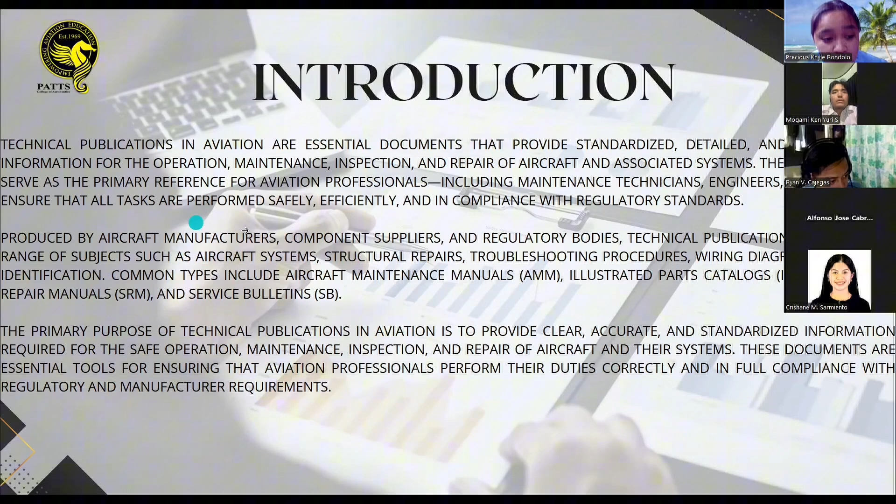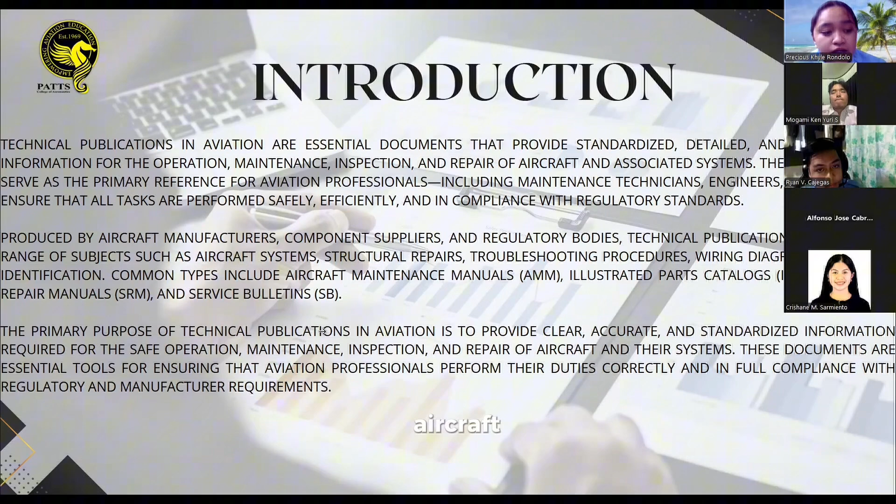The introduction explains the importance and purpose of technical publications in aviation. These documents are created by manufacturers, suppliers, and aviation authorities to provide clear, standardized, and authoritative instructions for operating, maintaining, and repairing aircraft. They ensure tasks are done safely and in line with regulation. Examples: aircraft maintenance manual, illustrated parts catalog, and service bulletins.

And for the summary of our topic, technical publications are critical documents that provide comprehensive, standardized information for the safe, efficient operation, maintenance, and repair of aircraft and their components. These publications are created by aircraft manufacturers, component suppliers, and aviation regulatory authorities to ensure that all aviation personnel, such as maintenance technicians, engineers, and pilots, have access to accurate and up-to-date technical guidance.

Aviation technical publications cover everything from routine inspection and troubleshooting procedures to complex repair instructions and system overviews. These documents help maintain compliance with strict safety regulations set by aviation authorities like the Federal Aviation Administration and the European Union Aviation Safety Agency.

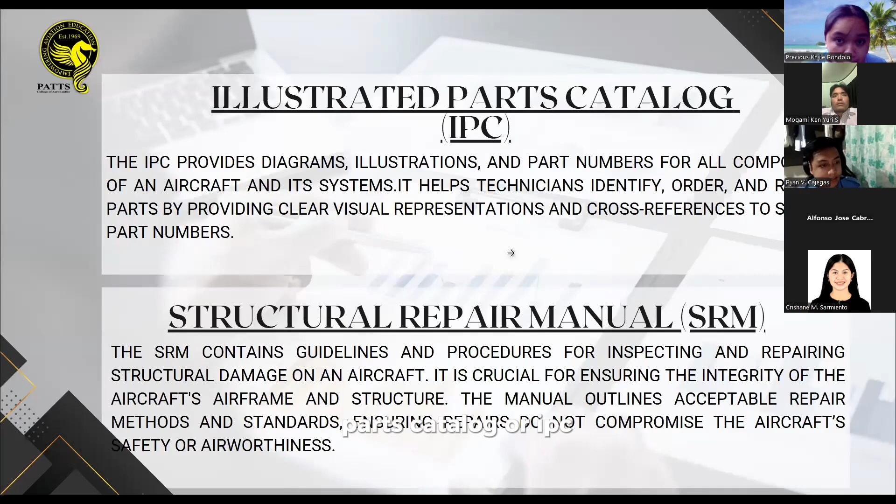Types of technical publication. Illustrated Parts Catalog, or IPC. The IPC provides diagrams, illustrations, and part numbers for all components of an aircraft and its systems. It helps technicians identify, order, and replace parts by providing clear visual representation and cross-reference to specific part numbers. This includes all parts for all systems and it's usually not customized by airline configuration. However, when the aircraft is customized, it will show parts by figure, part number, and item number with aircraft applicability. The second is Structural Repair Manual, or SRM.

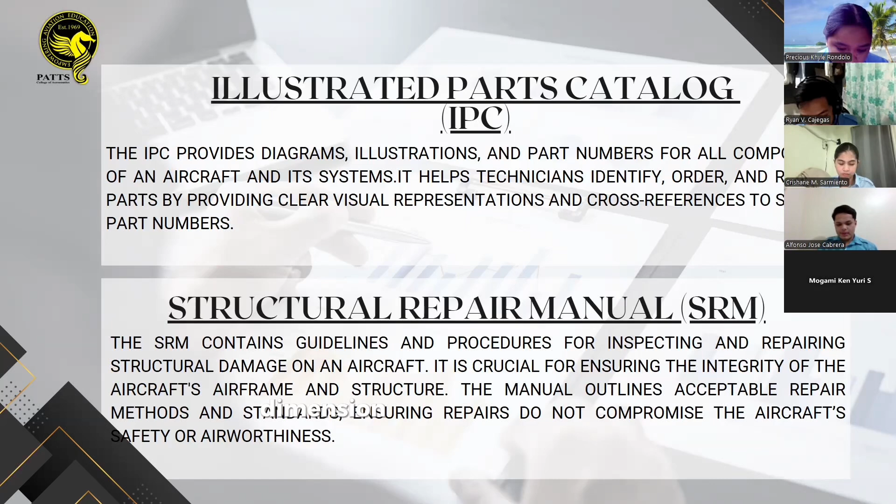The SRM contains guidelines and procedures for inspecting and repairing structural damage on aircraft. It's crucial for ensuring the integrity of the aircraft airframe and structure. The manual outlines acceptable repair methods and standards, ensuring repairs do not compromise the aircraft's safety or airworthiness. The SRM gives the acceptable dimensions and limits of damage to the aircraft structure, so the operator knows when the damage should be fixed.

The next one is Component Maintenance Manual, or CMM. The CMM provides detailed instructions for maintaining and overhauling individual aircraft components, such as engines, avionics, landing gear, and other critical systems. This manual guides technicians through the maintenance, inspection, and overhaul process for specific components. For the SRM and CMM, the components installed on the aircraft are chosen by the airline. The next one is Service Bulletin, or SB.

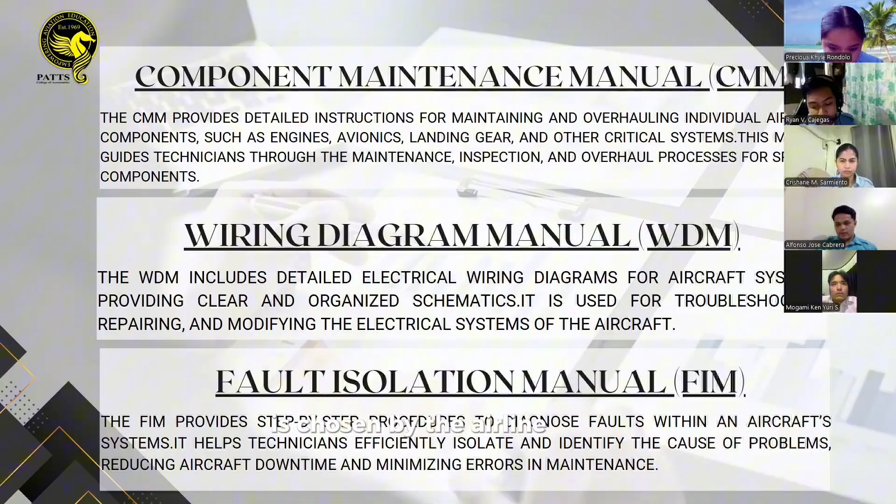Service Bulletins are issued by the manufacturer to provide important information about aircraft modification, upgrade, or safety recommendations. They offer updates and enhancements or fixes that improve the performance, safety, or reliability of the aircraft. SBs can be voluntary or mandatory depending on the nature of the information.

For example, if the flight crew seat has a vertical adjustment.

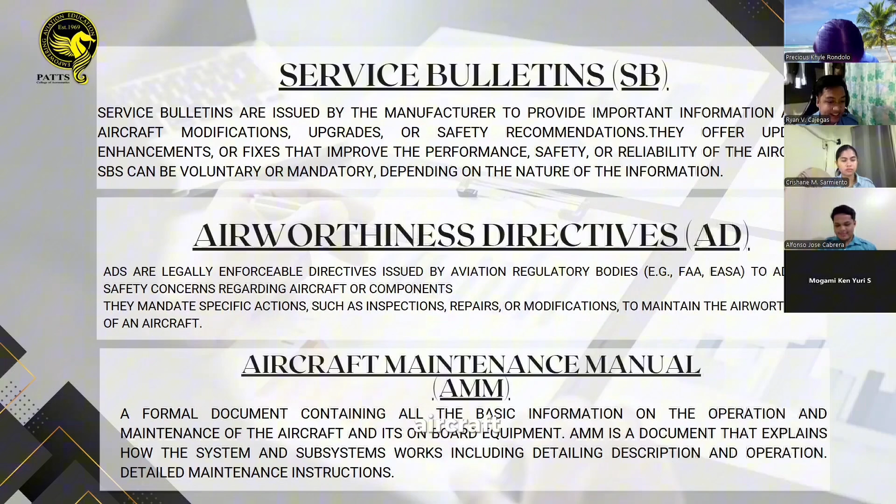The next one is Airworthiness Directive, or AD. ADs are legally enforceable directives issued by aviation regulatory bodies to address safety concerns regarding aircraft or components. They mandate specific actions such as inspection, repairs, or modification to maintain the airworthiness of an aircraft.

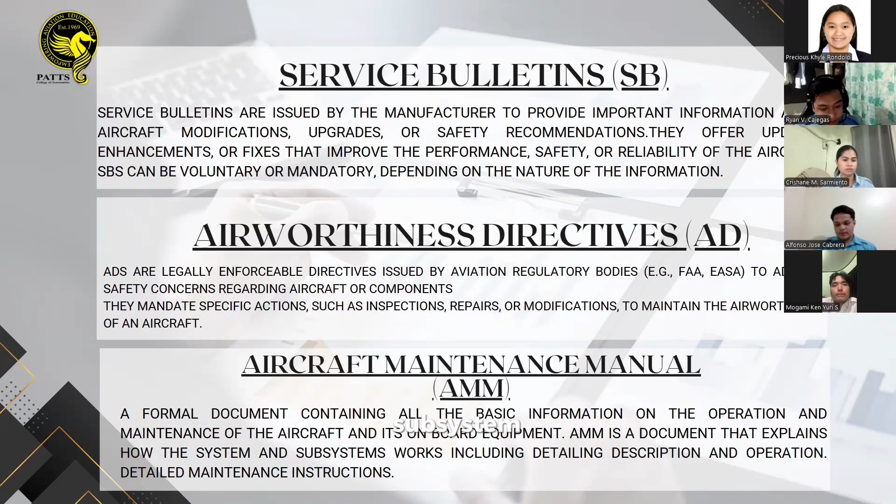The next one is Aircraft Maintenance Manual, or AMM. A formal document containing all the basic information on the operation and maintenance of the aircraft and its on-board equipment. The AMM is a document that explains how the system and subsystem work, including detailed description and operating detail, maintenance instructions.

Next one is function of technical publication.

Technical publications provide clear step-by-step instructions for the maintenance, repair, and servicing of the aircraft and their components. This helps maintenance personnel perform tasks accurately, reducing the risk of errors and ensuring the aircraft is in optimal working condition. Maintenance guidance provides detailed instructions about scheduled and unscheduled maintenance, ensuring the systems are serviced correctly.

Next is troubleshooting and fault isolation. Technical publications, especially the fault isolation manual or FIM, offer systematic procedures to diagnose and isolate faults in various aircraft systems. They enable technicians to quickly identify and resolve issues, minimizing downtime and ensuring the aircraft is returned to service promptly. Troubleshooting and fault isolation outlines systematic procedures to detect, diagnose, and isolate system malfunctions.

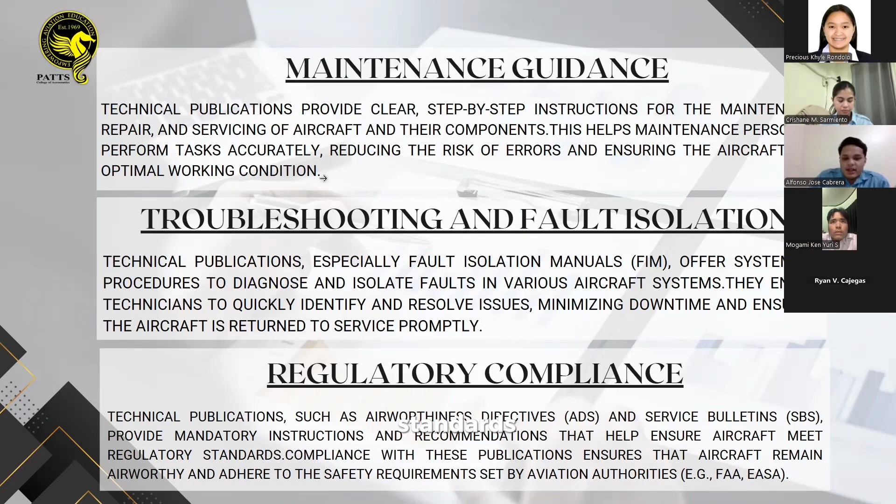Next is regulation, such as airworthiness directives or ADs, and service bulletins, which provide mandatory instructions and recommendations that help ensure aircraft meet regulatory standards. Compliance with these publications ensures that aircraft remain airworthy, ensuring all maintenance and operational practices meet aviation standards, especially the standards of FAA and EASA.

These standards apply to maintenance and operational procedures across different operators and locations. Standardization ensures that all maintenance activities are performed uniformly, improving safety and reducing the chances of errors or misunderstandings. This standardization of procedures implements a uniform process across maintenance activities to ensure consistency and reduce errors.

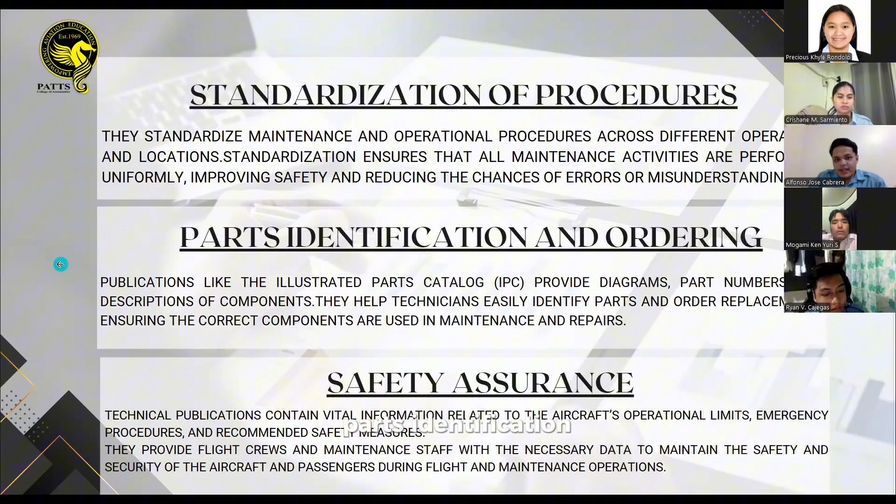Next is parts identification and ordering. Publications like the illustrated parts catalog or IPC provide diagrams, part numbers, and descriptions of components. They help technicians easily identify parts and order replacements, ensuring the correct components are used in maintenance repairs. Parts identification and ordering facilitates accurate identification of components and provides a streamlined process for ordering parts.

Next is safety assurance. Technical publications contain vital information related to aircraft operations limits, emergency procedures, and recommended safety measures. They provide flight crews and maintenance staff with the necessary data to maintain the safety and security of the aircraft and passengers during flight and maintenance operations. Safety assurance incorporates safety protocols and checks throughout operation to mitigate risk and maintain a secure working environment.

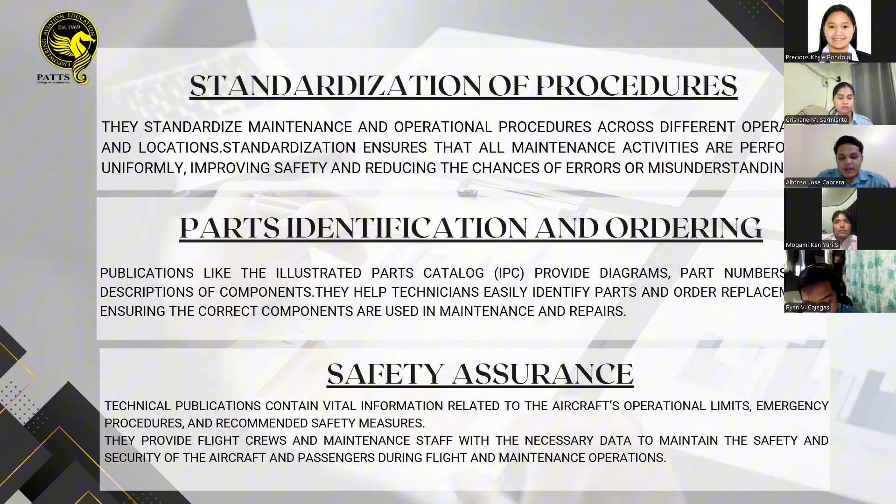Knowledge transfer and training: technical publications serve as a training tool for new personnel and as a reference for experienced technicians, engineers, and pilots. They support ongoing education and skill development, ensuring that aviation professionals are familiar with the latest maintenance practices, troubleshooting techniques, and safety protocols. Knowledge transfer and training supports ongoing educational and skill development for personnel, promoting competence and adaptation to new technologies.

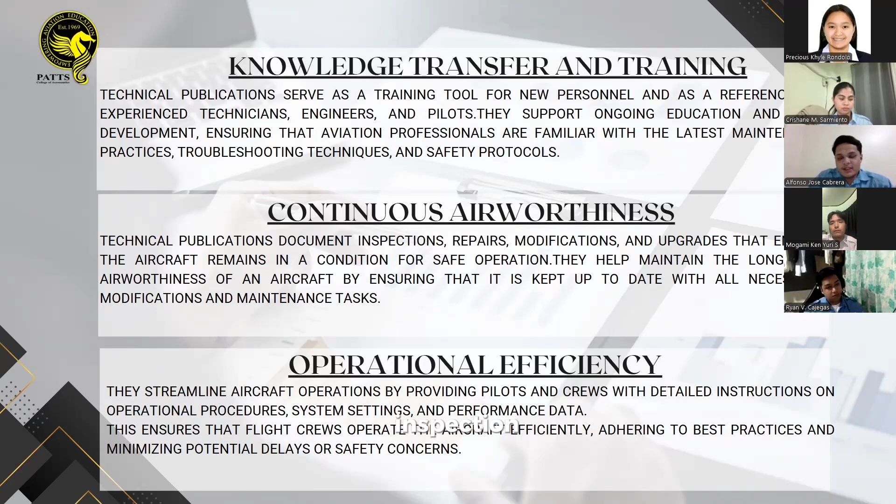Next is continuous airworthiness. Technical publications document inspections, repairs, modifications, and upgrades that ensure the aircraft remains in a condition for safe operation. They help maintain the long-term airworthiness of an aircraft by ensuring it is kept up to date with all necessary modifications and maintenance tasks. Continuous airworthiness maintains aircraft in good condition for safe operation through regular inspections.

Next is operational efficiency. They streamline aircraft operation by providing pilots and crews with detailed instructions on operational procedures, system settings, and performance data. This ensures that flight crews operate the aircraft efficiently, adhering to best practice and minimizing potential delays or safety concerns. Operational efficiency optimizes maintenance and support operations to reduce cost, improve turnaround times, and enhance overall productivity.

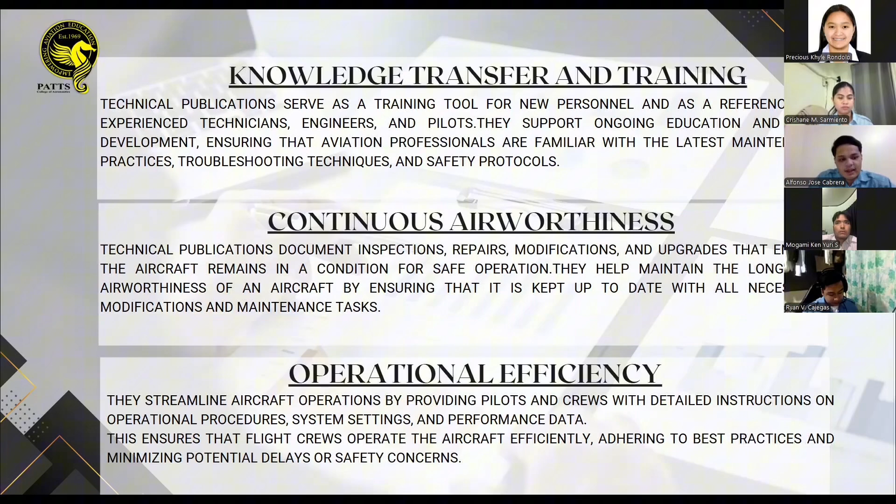Libraries are collections of technical documents, manuals, and reference materials maintained by airlines to support aircraft operations, maintenance, and compliance with aviation regulations. These libraries typically include the aircraft maintenance manual, wiring diagrams, fault isolation manuals, structural repair manuals, illustrated parts catalogs, service bulletins, airworthiness directives, operations manuals, and regulatory and OEM documentation. These libraries ensure maintenance personnel and engineers have access to the latest information for safe and accurate tasks.

Airline libraries generally fall into two main types: flight school aviation libraries and digital aircraft document libraries. Flight school libraries contain education materials for pilots, including manuals, handbooks, and safety guides. Digital aircraft document libraries offer airline personnel access to aircraft manuals, service bulletins, and other technical information in a digital format, often integrated with flight operations software. Flight school aviation libraries provide pilots and aviation students with the necessary knowledge and resources to learn and practice flying.

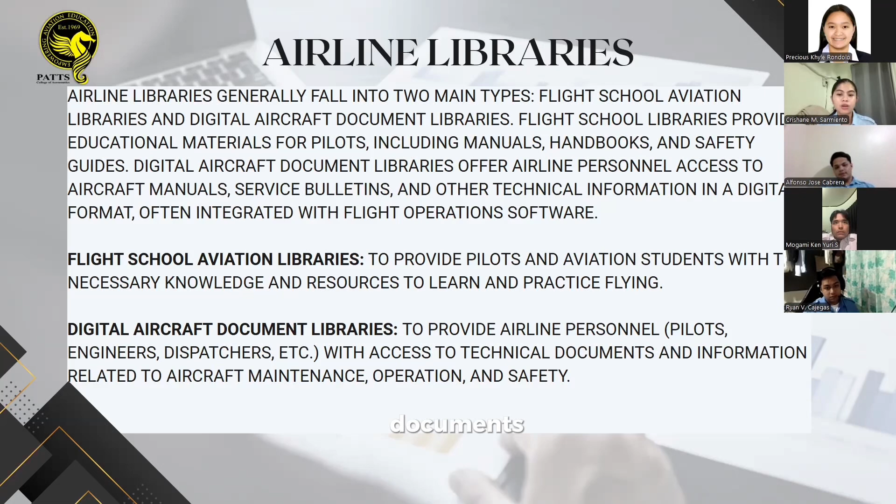Digital aircraft document libraries provide airline personnel—pilots, engineers, dispatchers—with access to technical documents and information related to aircraft maintenance, operation, and safety.

Control of publications in the aviation industry is a critical safety and compliance function. It ensures that all personnel have access to the latest, most accurate, and authorized versions of operational, maintenance, and regulatory documents. These publications guide daily operations and must be tightly regulated to maintain safety, regulatory compliance, and operational efficiency.

Control of publications in aviation ensures that all operational, maintenance, and safety documents are accurate, current, and accessible to authorized personnel. This includes flight manuals, maintenance procedures, charts, and regulatory notices, which are critical for safe and compliant operations. Document control systems like electronic flight bags and document management systems help manage updates and restrict access to outdated versions. Regulatory bodies such as the FAA and ICAO require strict adherence to publication control standards. Effective control prevents errors, enhances safety, and ensures smooth coordination across all aviation functions.

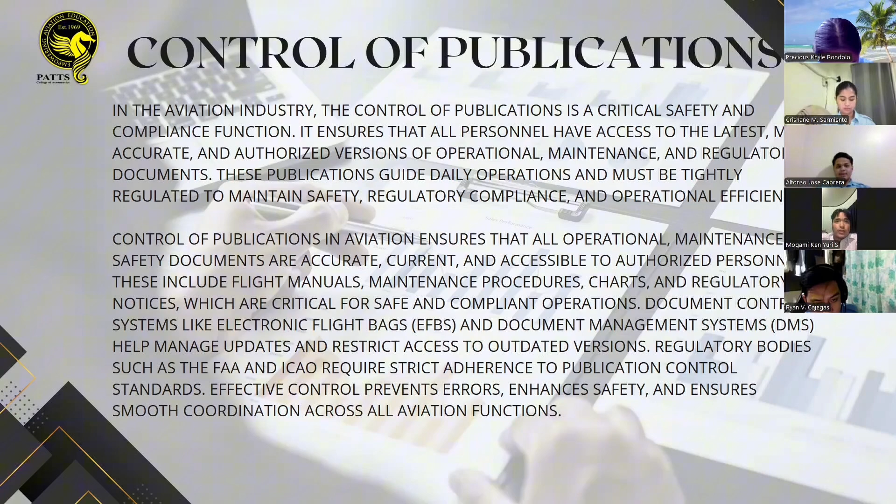Documentation distribution refers to the organized process of delivering essential documents such as flight manuals, safety procedures, maintenance instructions, and regulatory updates to the appropriate personnel. This ensures that pilots, engineers, and ground staff always have access to the most current and accurate information.

Distribution is often managed digitally through systems like electronic flight bags and document management systems, which allow for real-time updates and version control. Regulatory bodies like the FAA and EASA mandate strict guidelines to ensure that outdated or incorrect documents are not in use. Proper documentation distribution is vital for operational safety, regulatory compliance, and overall efficiency in operations.

It is paramount to ensure safety, compliance, and operational efficiency. Airlines, maintenance providers, and regulatory bodies must adhere to stringent standards set by authorities such as the FAA, EASA, and ICAO. These standards mandate that all personnel have access to the most current and accurate information.

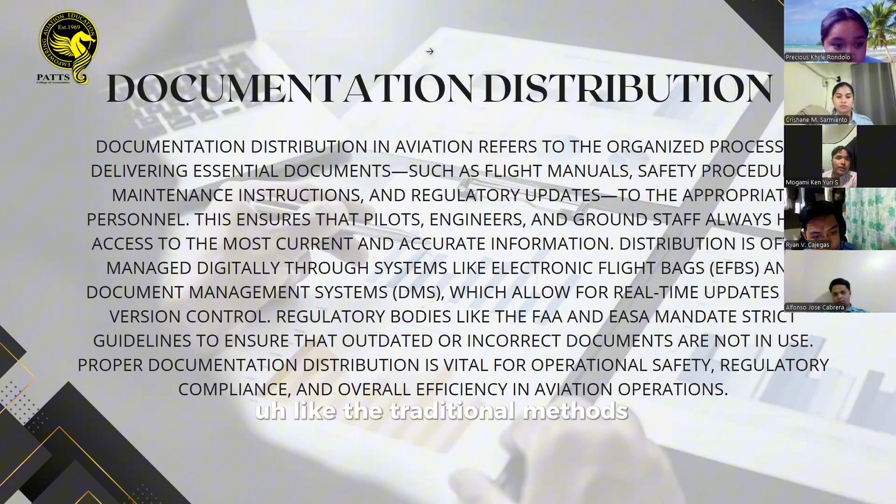Traditional methods of managing aviation documents, like paper-based systems, are increasingly being replaced by digital solutions. Modern document management systems offer features like version control, access permissions, and real-time updates. Online platforms provide centralized repositories where documents can be stored, updated, and secured. These systems ensure that only authorized personnel can view or edit specific documents, thereby maintaining the integrity of the information.

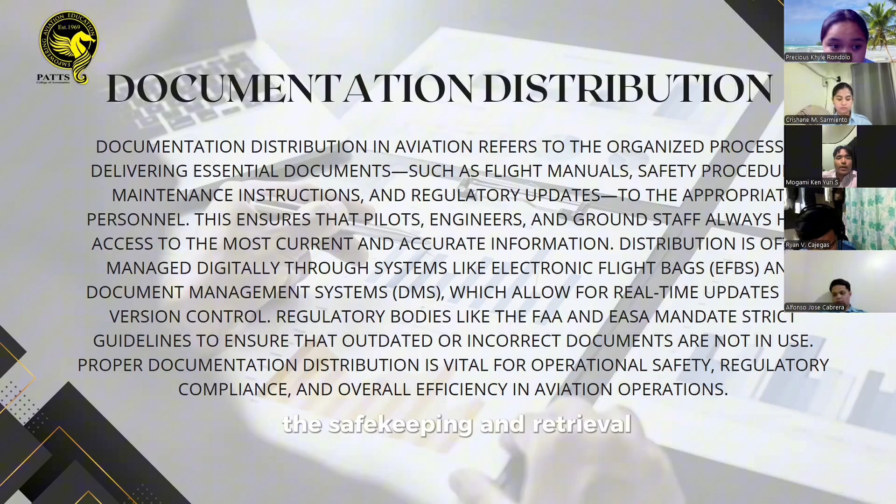Furthermore, the digitization of documents facilitates compliance with regulatory requirements. For example, the CAAP manages aviation records through its Aviation Records Management Division, which handles the safekeeping and retrieval of documents such as pilot licenses and aircraft registrations. This centralized approach streamlines processes and ensures that records are readily available for audits, renewals, or legal purposes.

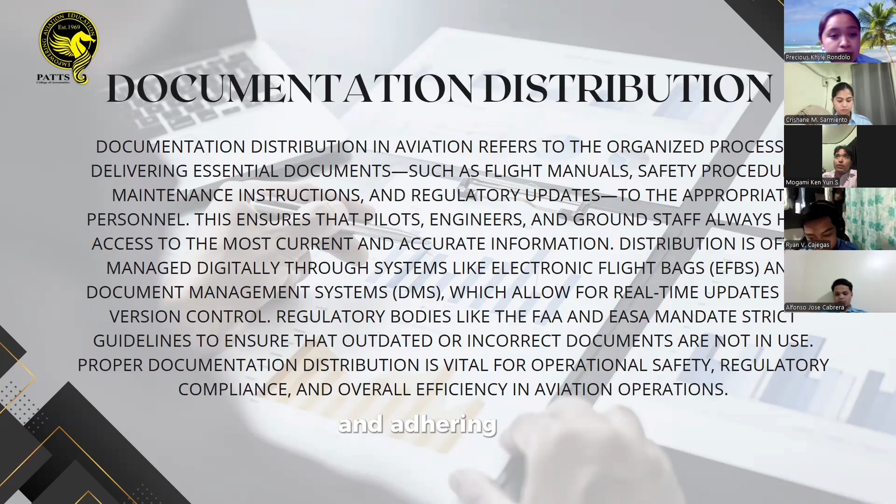By adopting these modern digital solutions and adhering to regulatory standards in aviation, it severely enhances the effective control and distribution of publications throughout different aviation organizations.